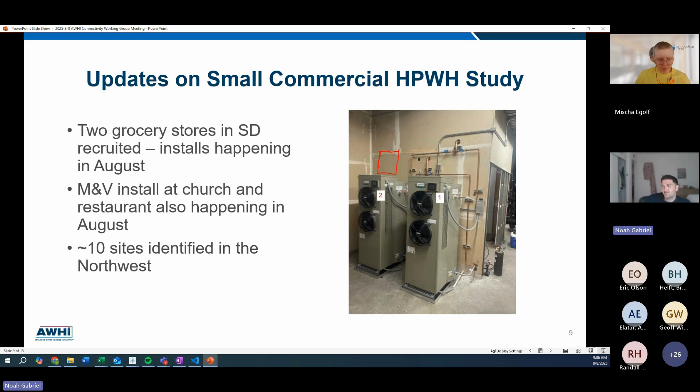And just a couple updates on the world of field studies that NBI is doing. We installed monitoring equipment at a few different grocery stores and other small commercial buildings throughout the Northwest and California. So a lot of cool stuff going on there. And if you want updates, definitely attend our commercial working group meeting.

And same thing for an IntelliHot installation in Chicago. Previously, we had 2 gas boilers here, and a retrofit happened to where it's now 4 IntelliHot IE1s with a tankless gas backup. So those are the 2 most recent developments in our load shifting field studies. And if folks have their own field studies they want to have highlighted, definitely let me know and I can touch base on them in our next working group.

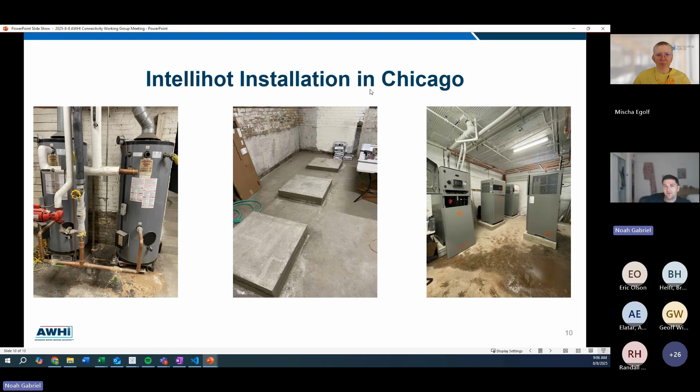With that, Mischa, do you want to go ahead and share slides? Sure. And we'll get into our Texas load shifting pilot. Yeah, let me get my screen share going here.

And I'll just do a quick intro. My name is Mischa Egolf, for those who don't know me. I work with Noah, and we've been working together on this field study, this pilot in Texas. It is an ongoing project. It is funded by the Department of Energy, and we are currently uncertain about its future, but we do have some preliminary results, so we're going to share those with you today.

So it should be hopefully showing on my screen now. Looks perfect. All right.

So this pilot program's goal was to target multifamily buildings and increase demand response and resiliency. They were piloting a dual incentive approach and a dedicated device network that would allow them to control both the air conditioning units and electric resistance water heaters in the apartments. The incentive design was for each participating tenant: they got a $50 one-time enrollment credit, and then somewhere between $25 to $35 annual bill credit. I think it depends on their income.

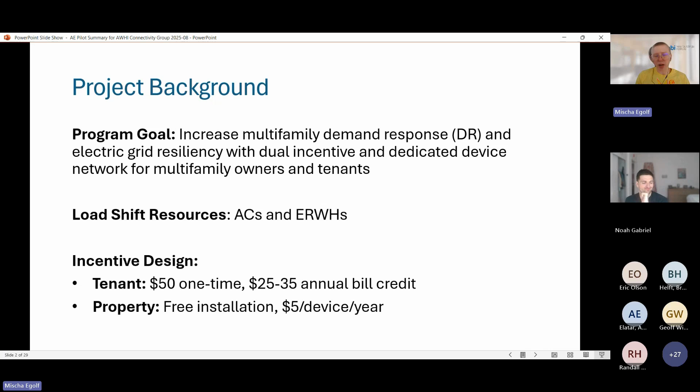And then for the property, they get free installation of the load shifting technology. And then for every device that's enrolled at the property, they get $5 per year. So, for properties that have 200 plus units, if everyone is enrolled for both their air conditioners and their water heaters and fully opted in, that could be a couple $1,000s a year. So not insignificant.

And this utility definitely has some goals related to demand flexibility, and Texas certainly has very high demand. This chart that Noah made shows the annual grid peak, and you can see that it's continuing to just go up and up, exceeding 80 gigawatts. So definitely important to look at this technology.

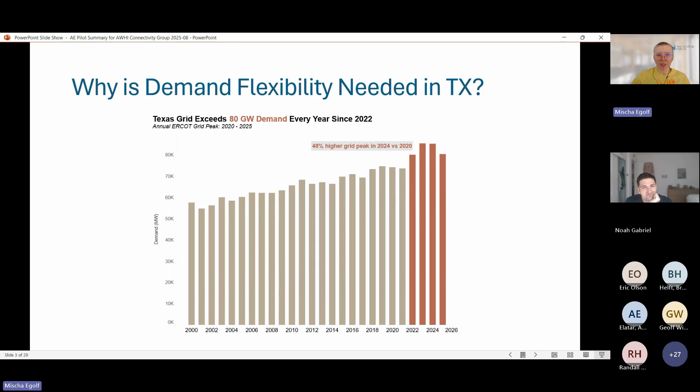So just to give you a little more information about the type of properties that were included, there were 2 properties right now. If it continues, there may be a 3rd property added. The first property was built in the 80s, and it's got about 200 units. The second property was newer, built in 2024, a little over 200 units as well. Both are multi-building, 3-floor garden style properties, with lots of trees and yards in between the different buildings. But they all have 2 to 3 ton HVAC equipment with electric resistance heating and 30 or 40 gallon electric resistance water heaters. So here's a picture of one of the typical water heaters.

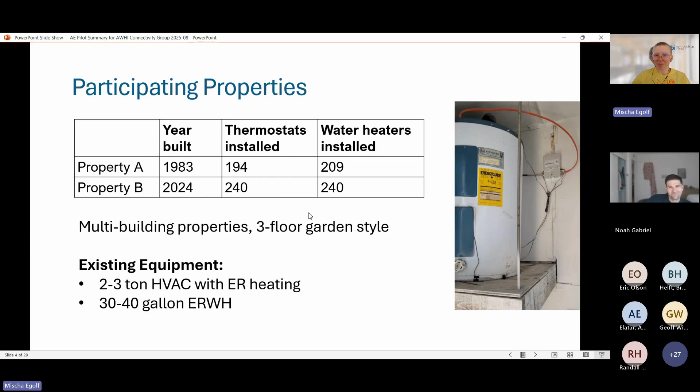So for this study, it included a few different technology pieces. There were water heater controllers. You can see an example here of the analog timer that existed before the replacement. And then what was installed for this study was Armada Power controllers. They also installed new thermostats. They had old radio frequency thermostats that were very limited in terms of their functionality. But as part of this program, new DR enrolled Ecobee Lite thermostats were installed.

And to be able to control all of these things together, the goal was to have one singular communication network that everything was connected through. And so what ended up working for them was a Wi-Fi network from the cellular Cat-M network that is through the Armada controller. So basically the Armada controller for the water heaters was also acting as the Wi-Fi network for everything. And the utility also installed M&V equipment in about 5% of the installed units, and we used eGauge for that.

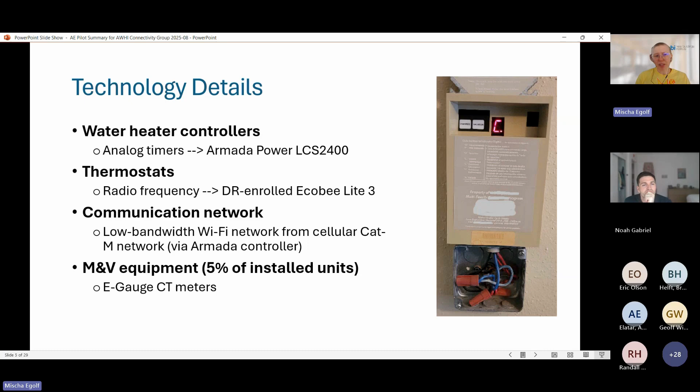So in terms of the actual events, for water heaters, they ran daily events for a lot of the months, and in both seasons, they did both a morning and evening event. In the summer, they did from 1 to 5 a.m. and 3 to 7 p.m. And then in winter, 6 to 9 a.m. and 6 to 9 p.m.

And I'm sure some of you are wondering why 1 to 5 a.m. Could not tell you. That was totally the utility design. So that's a good question that we can take back to them if people are wondering that. But yeah, those are the periods that they basically just switched the water heaters off. And through the Armada platform, you can see highlighted here in this screenshot, there's a lot of configurable settings. So typically, they set a preheat period of 30 minutes before the shed event started.

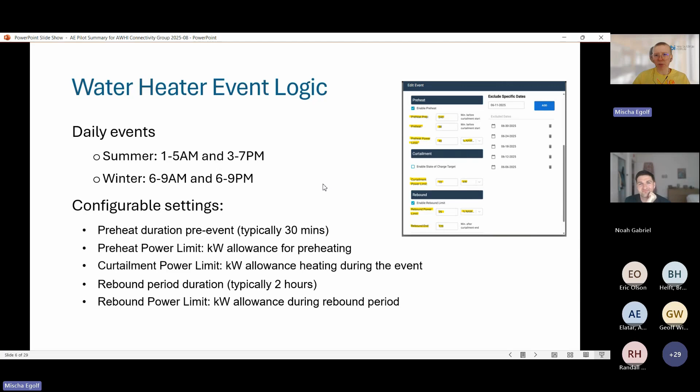They also, you can limit your, or kind of dictate the kilowatt allowance during that preheating period. I think it's like 1% of the nameplate that you can dictate. You can also dictate a curtailment power limit, so your allowance during the event. And then also your rebound period duration. So when it's kind of trying to recover, typically that was set at 2 hours, and then also can set the kind of allowance for how much power you're going to let them draw during that period. So very customizable.

With the thermostats, these events ran kind of on select days, kind of like the most critical peak days in the summer, June to September. It included a 30-minute pre-cooling period where the temperature was decreased by 2 degrees Fahrenheit, and then a 2-hour curtailment from either 3:30 to 5:30 or 4 to 6. The default setting in terms of the shift during that period was shifting up 4 degrees Fahrenheit,

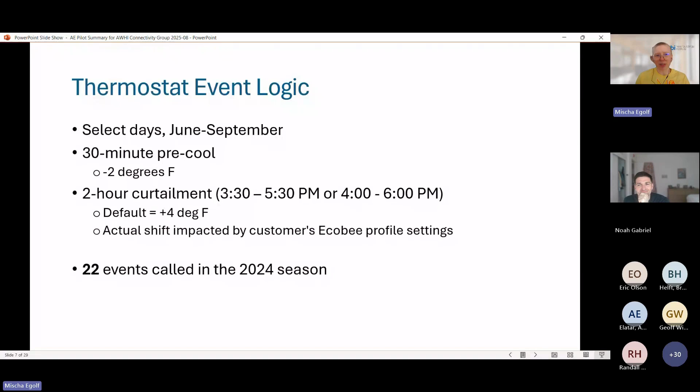but one of our findings is if folks have set up a profile via Ecobee, that could impact the amount of shift. So we'll see this in the results, but even though there was kind of a standard goal in terms of the logic of the events, that wasn't actually always what happened, which definitely made understanding the results a little bit challenging. There were, however, 22 events that were called in the 2024 season. So the technology did work and was able to be deployed in that way.

So I'll pass it to you, Noah, to talk about results. Perfect. All right, I'll take control here so I can shift. But yeah, thanks a ton, Mischa, and really helpful context there too, because as you could see, there were different controls for the water heaters versus the air conditioning, and I think it's a bit of a foreshadowing there that the air conditioning controls were not super aggressive, and I think that's going to be shown in the results.

And I'm getting some weird gray blocks here. So you know what? Mischa, will you take control back and I'll just request you to move slides? Awesome. Yeah, it was just Teams was doing something funky there.

So just for some context setting, before talking about load shifting results, we just wanted to show what the seasonal water heating energy use was, and this is going to be broken down by the apartment level. So if you look at the bottom there, A001 through B191, those are just the apartment IDs. So you can see little box plots here showing the range of energy use, specifically for these electric resistance water heaters between apartments and by summer versus non-summer.

So this wasn't quite a full year, so we don't capture all of the different seasonal shifts there, but especially since it's Texas anyway, and there's really just a hot versus less hot season, summer versus not quite as hot time of year is really what you want to pay attention to here. And just to establish our baseline prior to talking about load shifting, you can see that the average during the summer was somewhere around 2 kilowatt hours per day per apartment, and it was closer to 4 for the non-summer use. So as one might expect, based on previous literature, more energy is used during the colder times of year, even if it's only relative because it's Texas.

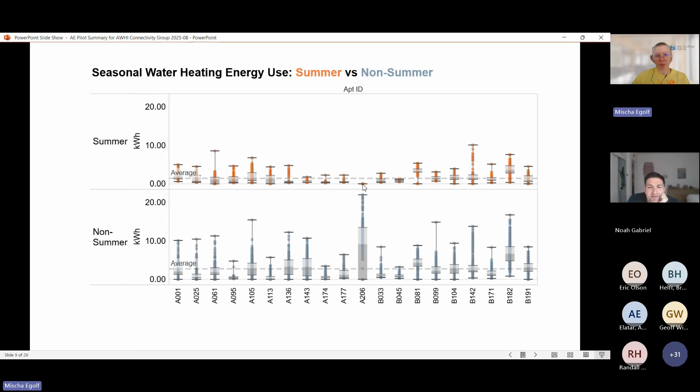I might just jump in really quick to mention that these apartment IDs are the ones that have the eGauge meters. So the results shown here are that subset of representative units that got the M&V. Just wanted to mention that. Yeah, so it's 11 per apartment, right, Mischa? Per building, yeah. Or property. Yes, totally. So as Mischa said, these DR signals were being sent to all the units that had that applicable technology and were opted in, but we only metered a subset because it's expensive, right? But hopefully it was showing enough of a sample to get close to what the actual population baseline looked like.

But yeah, so water heating, we wanted to take a look generally at what event versus baseline looked like for September, October, November, and December when the load shifting events occurred. And you can see besides October here, there was quite a noticeable impact on average hourly energy use. So massive curtailment in 3 out of those 4 months. We're not entirely sure what happened in October, if the conformance to the signals was not being properly used.

Oh, and a question from Stephanie here.

Is this only during event hours or the full day? So this is if you basically take an average of all the hours for events during this same period versus all the hours for baseline. So baseline versus events here, averaging a single hour. So basically how you want to read this chart is, say for September, an hour that was not being load shifted, you would likely use about 160 watt hours. And then during an event hour in September, you'd likely only use about 30 watt hours. So yeah, that's the interpretation there.

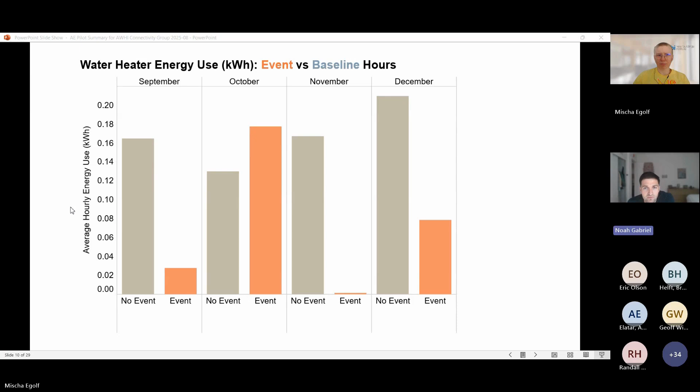Next slide. Yeah, so the whole apartment meter data is going to validate those same findings. So Mischa, do you want to talk a bit about how the whole apartment meter data worked versus the individual power metering for the units? Sure, yeah. So this was just another data source that we used to validate our findings. So we had the eGauge M&V meters. We had what the tenant unit meter saw for the whole apartment. And then we also have data from Armada. So we had these 3 data sources that we're using to corroborate all this information.

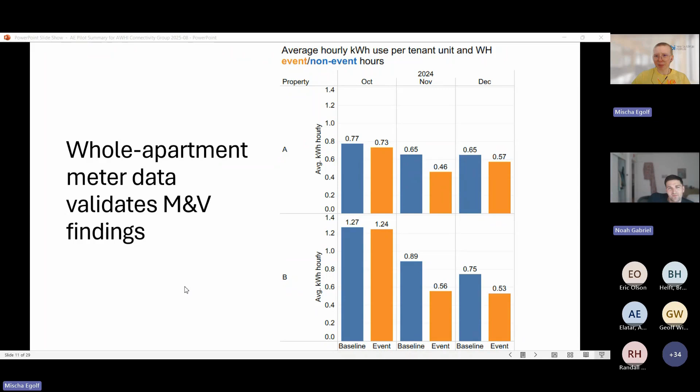And basically the takeaway here is just showing that in October, there's not really much shed in terms of the hourly kWh during the water heater event periods. But in November and December, you are seeing the entire apartment use going down because of the water heater use going down. And it's about the same in terms of the magnitude. So just trying to show in terms of study design that there is a little bit of a check and balance here in the data that we're seeing. Awesome. Thanks so much. And next slide here.

And then this is a similar view here, just displayed slightly differently, again, for baseline versus event over the course of a whole day. And this is for your entire baseline for all the time we were measuring data for baseline versus an event. So this is an aggregate really of the whole thing here. And so you can see, in general, that you're going to have a pretty sharp decline in the early hours of the day per the study design, a pretty large spike immediately following as you have that rebound effect, and that'll be echoed in the morning and the afternoon. So again, just showing that generally speaking, water heating load shifting was quite successful. Next slide.

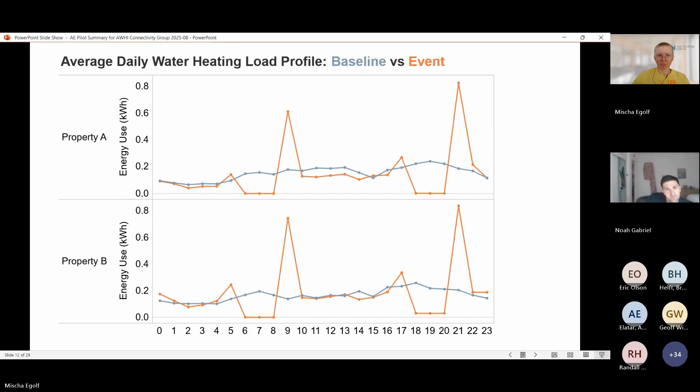So it's a little bit of a different story for thermostat design. I think it goes to show that air conditioning load shifting is a bit trickier. Again, to set context here before we dive into results, we show the opposite pattern as one might expect from water heating, where in the summer, of course, you're going to be using a lot more HVAC. This is specifically looking at condenser use. So you can see some pretty wild spikes here from apartment to apartment and from day to day. So each square here, be it orange or blue, is going to represent 1 day of energy use.

And if you want to take a look, for example, at A061 during both the non-summer and summer months, you can see a crazy variability there, right? Between clustered around 5 to 10 kilowatt hours, and then some crazy spikes all the way up to like 30 kilowatt hours in a day. And we did already filter for outliers here because you can see for other apartments too, such as B033 and B045, there were plenty of days per year during the summer where there were more than 20 kilowatt hours used. So pretty darn energy intense air conditioning units here. So not the most efficient, so that made them all the more important to load shift.

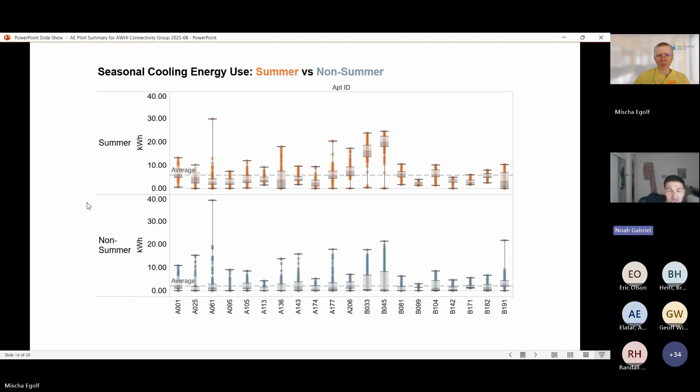So next slide. And again, just corroborating like Mischa said, using whole apartment meter data and showing some similar results here. Next slide.

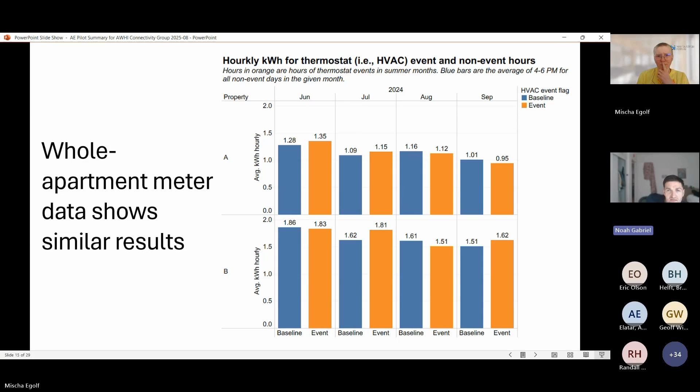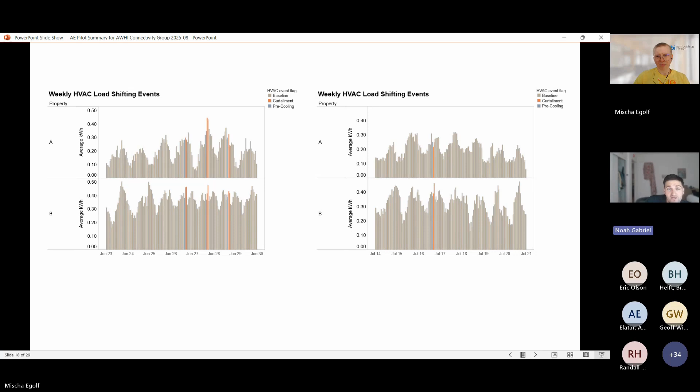But this was just at a glance, and it was not accounting for what are called cooling degree days or cooling degree hours, basically meaning we did not account for temperature in this visualization. So our early thesis was that since these load shifting events are being called on the days where the temperature is the highest, basically the highest number of cooling degree hours, perhaps that's skewing our results a little bit. So we wanted to dive even a bit deeper since this initial exploration was not showing much in the way of curtailment. Next slide.

And even with filtering for cooling degree hours, we did a little custom calculation in Tableau on the right there, where we only included hours that were 28 degrees to 41 degrees above the cooling degree baseline, which is 65 degrees. So that means basically between 93 and 106 degrees. So only filtering for baseline days that were similar to when the curtailment and pre-cooling events were being called, basically just hot days. We wanted to make sure we weren't looking at baseline hours where it was colder outside, usually during the evening and nighttime.

And as you can see here as well, curtailment was not noticeably smaller in terms of average kWh per hour than the baseline was. And you'd think pre-cooling would be much higher. We see a bit of a trend happening here in September where pre-cooling is higher, curtailment is a bit lower than baseline. So that's kind of what you'd expect, but still, not a huge visual jump there. Next slide.

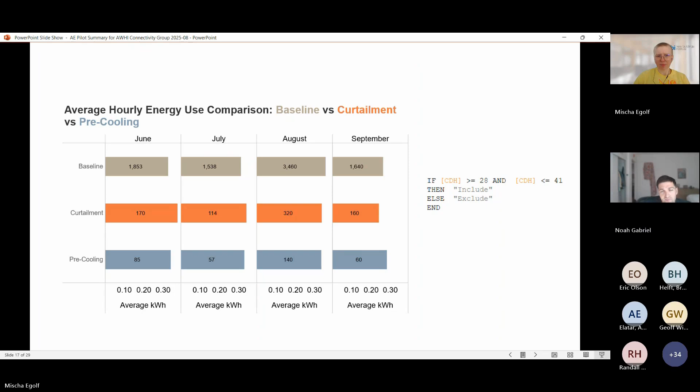And to zoom in even closer here, we're receiving 15-minute level energy data, and we thought that might unlock some patterns that were easier to distinguish just by looking at them without running a regression. I'm going to show in the next 4 slides an example from each month during summer where there were load shifting events sent. And I think this 15-minute level is going to really illustrate that these events were working to some extent. They just weren't necessarily aggressive enough.

And that will make sense given that there were only 2 degrees of pre-cooling and only a 4-degree shift upwards. It's just hard to do AC load shifting, because if you're doing more than a few degrees up or down, that really might impact occupant comfort and have people opt out. So it's kind of a fine line to toe. Looking at our key here, our HVAC event status, blue is pre-cooling, orange is curtailment, red is the hour after the events were called, and gray is your baseline.

And this particular visual exhibits some of the behavior we'd expect, where pre-cooling is somewhat higher, not too noticeably, but again, it was only 2 degrees Fahrenheit that were pre-cooled. During our curtailment period, it does start lower and then slowly goes up as the energy requirement goes up to use some air conditioning. In our post-event hour, there's a bit of a spike at first, and then it drops off once the space is presumably cooled again, and then baseline just resumes normal, somewhat spiky activity.

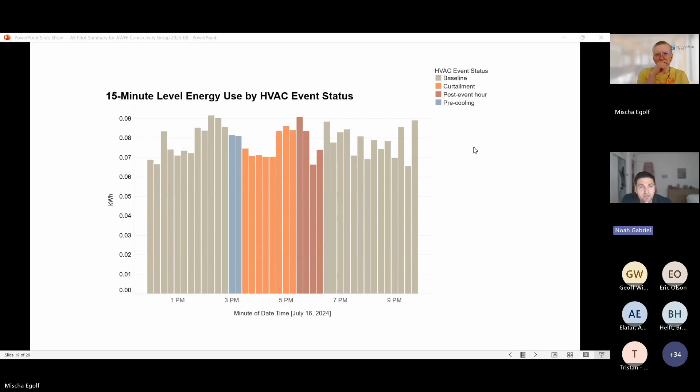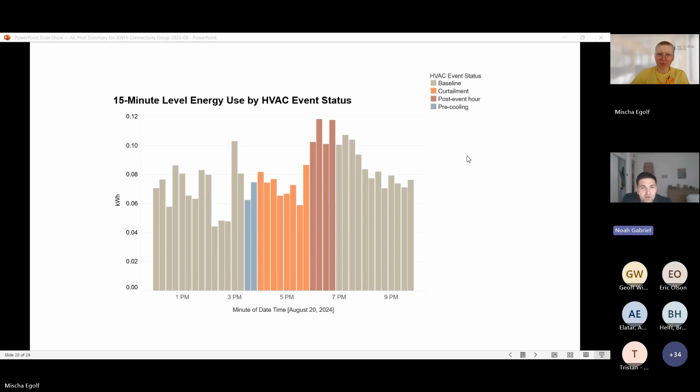Just taking a look at August here, I'm not sure if the control logic was changed here. Perhaps it was, because we do see more of a noticeable shed throughout most of that 2-hour window, and then quite a huge spike right around 6 p.m. Again, it's hard to say if that's because folks are coming home from work or because the shed was actually able to last longer, but certainly interesting results nevertheless. And then we see a slow and gradual decrease around 7 p.m. into nighttime when folks are likely going to bed or turning off their AC because it's no longer so hot outside. Next slide.

And then September, this one was, I think, the most interesting of all, where you had the most noticeable post-hour spike. And I think that's why we really wanted to go down to that 15-minute level here, to illustrate certain trends like this one where curtailment is slowly creeping up in energy use. And then in that post-hour, you do see a huge rebound effect. And if we were to get more air conditioning units, shiftable resources on the grid, that's going to be something that program managers and utilities have to keep track of.

I know we've had researchers on these calls before talking about rebound effects, such as Dr. Bass and Peter Grant, and the ability to slowly let different assets off their curtailment and rebound more slowly. So that's just a good consideration. I know in this study we do have some controls around post-hour energy use and rebound, like Mischa was talking about, but I'm not sure exactly how effective that was, given that we consistently see spikes after that curtailment period's over.

Geoff? Yeah, good stuff here. And I think it's worth noting, you got to remember a couple things with the building stock in Texas. Yep. One, they're not great. And two, yeah.

August and September are generally their hotter months, and there is a lower sun angle that also may be impacting the west-facing windows, which would force this up. Even if the temperature was right, the sun may be hitting a thermostat. So there's all kinds of variables there. Whereas if you look at, say, June, July, those buildings have not heated up over the duration, and or there's a dampening effect. So I'd look at the diurnal cycles as well as the seasonal cycles of temperatures.

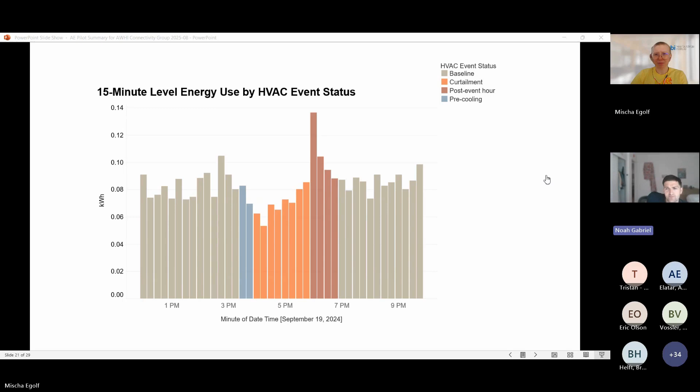Yeah, for sure. Really fascinating points. Great add, Geoff. Thanks a ton. Next slide here.

So Mischa, do you want to get into implications if we were to have this pilot elsewhere and bigger picture ramifications? Sure. So this is just a little bit more context, thinking about where you might want to replicate this if you wanted to replicate it. Texas has a lot of multifamily units. So that works in its favor if you wanted to pilot this kind of multifamily, everything connected to the same network approach. So that's something to think about.

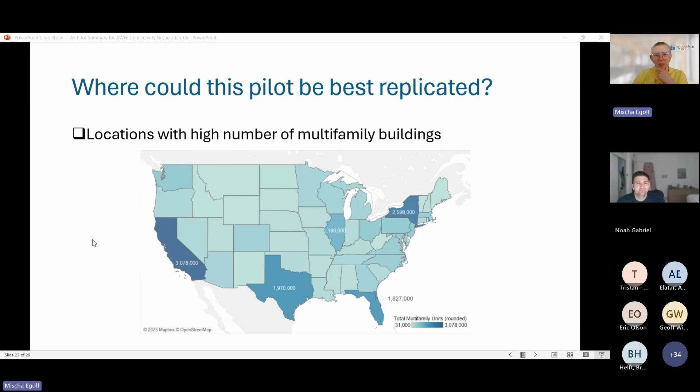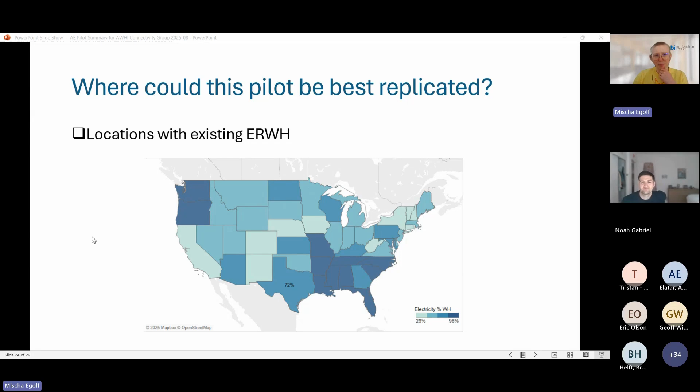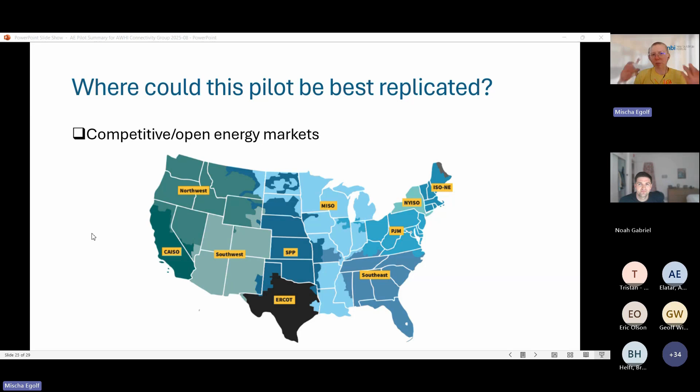Also, of course, we are all familiar with the map of where the existing electric resistance water heaters are. That obviously worked in favor because they're already there and it's easy to do this kind of on-off switch. And going back to the beginning, ERCOT is especially a unique setup. They do have the 4CP program, which means utilities are allocated a certain amount that they have to pay for the load that's on the entire system. And so from the utility perspective, they're very interested in shifting this load and lowering their cost burden. So thinking about that as well. Yeah, it's basically like a demand charge for utilities, which is a super interesting market component.

Yeah, totally. But there were a lot of challenges in addition to some of the basic design stuff we talked about. It was really difficult to engage property owners to get enrolled. Getting those two properties enrolled took a long time, and we had to request a no-cost extension, because with the legal paperwork aspect, when you've got a utility trying to contract with a building, it's just messy. There are also some dead zones. And again, I think that goes to Geoff's point about the building construction. So that's something to be aware of.

The thermostats, even though they do have this great shifting capability, there's a level of complexity that made it challenging, both for the utility to configure for the events and also because the customers could set up a profile and their own custom schedules. Those schedules interfered with the utility signals at times, was what they were finding. And so that was definitely a challenge.

As you would expect, tenant turnover is certainly a challenge. You have a new tenant coming in and now you have to try to educate them and make sure they're okay continuing with the enrollment. Building staff, if you've worked with them to install the whole connection system, and then the building staff turns over, now you've got to do that education again. In general, it's difficult for the utility to manage and understand the data. So that was kind of our role here.

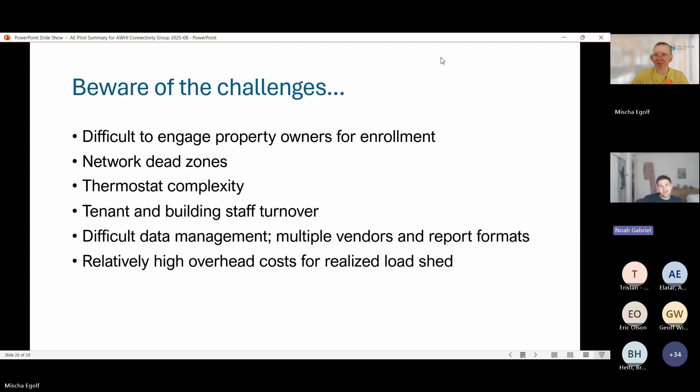Yeah, I think we can wrap it there, but there are a few questions in the chat. Thanks a ton, Mischa. So I'll direct a few at you here, if that's cool. Yeah. So Bruce asked, is the effectiveness of pre-cooling separated out for each building?

Oh, kind of like in those charts, because I think the charts that you showed now were kind of the aggregate of both properties, right? Yeah, some were. I think some did show apartment A versus apartment B, they were separated some, but do you know if the research team had any considerations for differing the schedules between buildings, or did they use the same exact load shifting schedule for each one?

Good question. Yeah, so for the most part, they deployed the same logic to both properties. I don't think that they had any specific events where they were like, let's try it at this property but not this property. So that would have been a great add to the study design. But I think in most cases, it was just like they're both getting the signal or neither of them are getting the signal.

Awesome. And then a question from Kevin here. Customers were given incentives to opt into the program. Are they allowed to opt out at any time? Yep. So I think with the water heaters, it's a little bit more like they would have to manually flip the switch, so to speak. There's not any sort of app or anything that the customers would use for that.